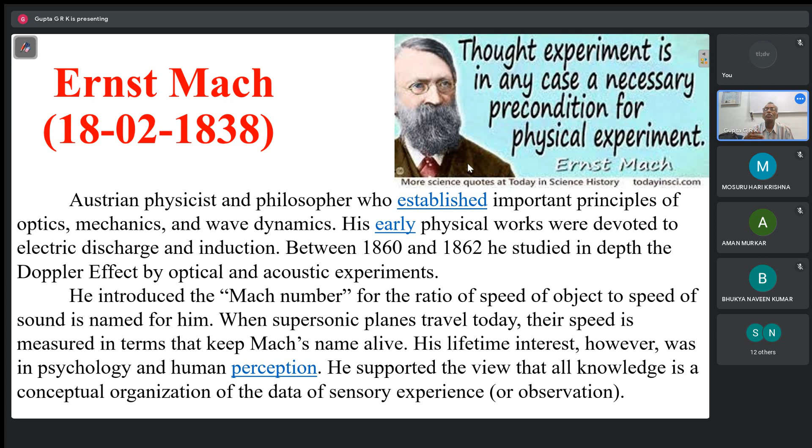So in the vaneless space, what is going to happen? P naught also is constant. And here what we assume is the flow is free vortex, or angular momentum is constant. So R CW is equal to constant. These are the things we assume. Knowing R and CW at impeller exit, I can find out CW at diffuser inlet.

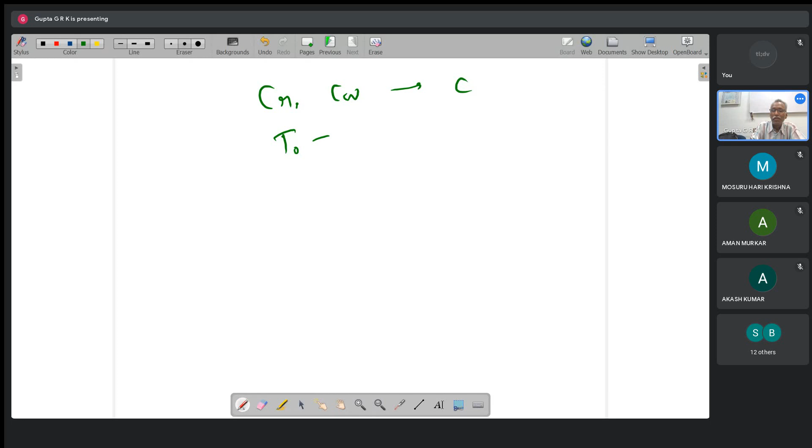So here we have to iterate, assuming CR2. Knowing CR and CW will give you C, and knowing C, I can calculate T. I can calculate P using the isentropic relation, then rho, and then CR. So A is 2 pi r b. In that way, I have to get it and repeat the calculation.

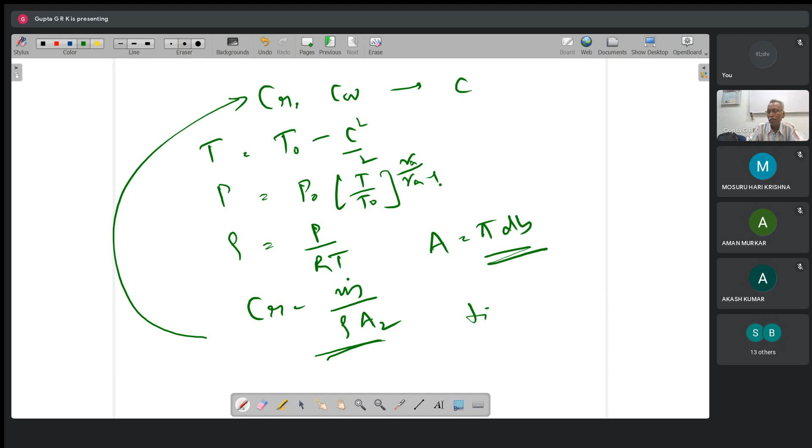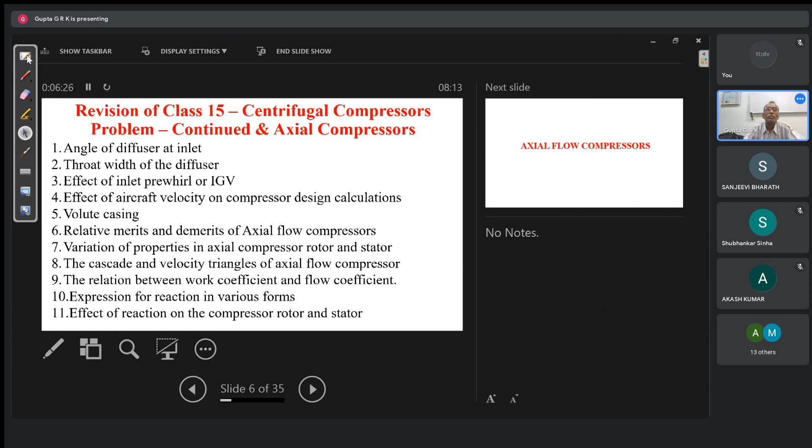Sir, not audible. Sir, your video is lagging. Lagging? Yes, sir. What to do? I cannot do anything. It is coming later. At that arrow mark, you were stuck for 15 seconds, sir. And again we are seeing this window, at the radius of. Okay. No problem, sir, you can continue. If again there is any difficulty, you tell me. We will ask again, sir.

Okay. So repeat a similar calculation at the radius of the diffuser throat. We calculate CW, assume CR, and calculate C, then T, then P, then rho, then again CR, and repeat it. Then calculate alpha equals tan inverse CR by CW. Then the area is taken to be 2 pi r b into sine alpha. This becomes the area, and once you get this area, divide by the number of blades, Z.

This gives me the diffuser throat width, where Z is the number of diffuser vanes. So this is the way we have to do the problem. And then two more points. If there is an IGV, consider pre-whirl.

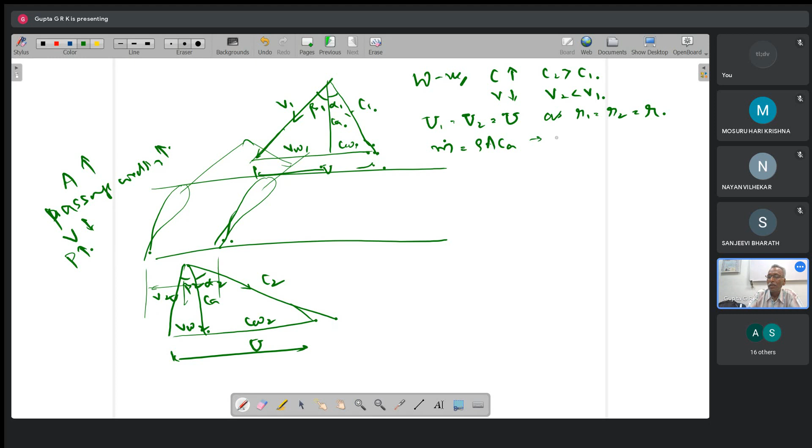And so m dot is equal to rho A CA. And here rho increases and A decreases, because of which CA is constant. So U is constant and CA is constant. That is, the base and altitude of inlet and exit triangles are the same. Okay, so these are the things you have to observe.

And then we have derived various relations like U is equal to CW1 plus VW1 equal to CW2 plus VW2. So from which we get CW2 minus CW1 is equal to VW1 minus VW2. And also this is CA into tan alpha 1 plus tan beta 1 is equal to CA into tan alpha 2 plus tan beta 2. So these are the things we have seen.

Or if I divide this by CA, U by CA; CA by U is the flow coefficient. So I'll get 1 by phi is equal to tan alpha 1 plus tan beta 1 is equal to tan alpha 2 plus tan beta 2. Okay, so this is one relation. And then we have got W is equal to U into CW2 minus CW1 or U into VW1 minus VW2, or this is equal to U CA into tan beta 1 minus tan beta 2. This is the second relation. So I can take this as the first relation.

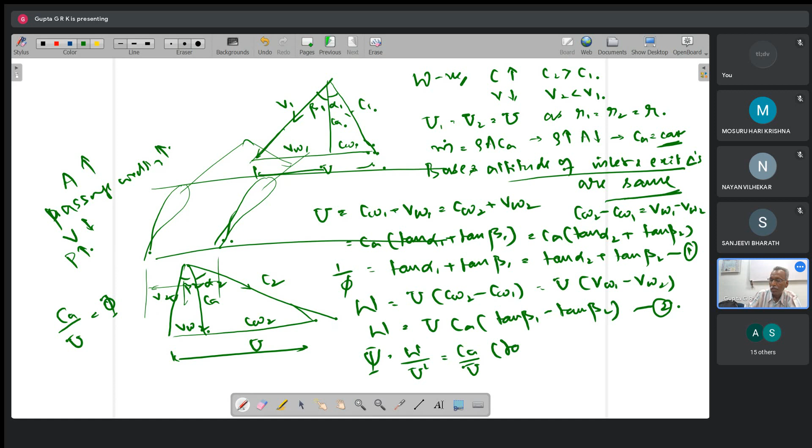And so W by U square, if I divide by U square, psi is equal to phi into tan beta 1 minus tan beta 2. Okay, so this is one relation. And then we have defined what is reaction. And the reaction is delta H rotor by delta H stator plus delta H rotor.

So delta H of stage is equal to delta H naught of stage if C1 equal to C3. That is, if they are repeating stages. Repeating stage means C1 equal to C3 and alpha 1 equal to alpha 3. And delta H naught of stage is equal to W. So R is equal to, for delta H of rotor, H2 minus H1 by W. So H2 minus H1 is V1 square minus V2 square by 2, by W.

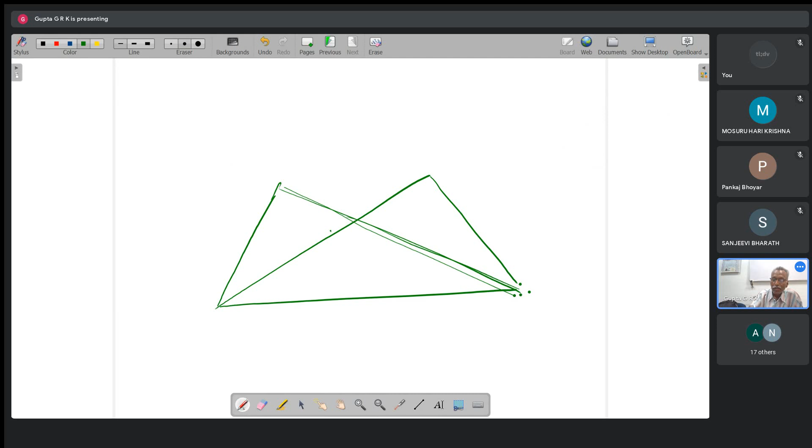So what I do is inlet triangle large V1 small c1 and exit triangle small v2 large c2. Okay, this is v1, this is c1 inlet triangle, and u is same for both. Height is same for both. And for inlet triangle, this is alpha 1, this is beta 1, and this is c2, this is v2, this is alpha 2. Okay, so this is the way I can overlap both the triangles.

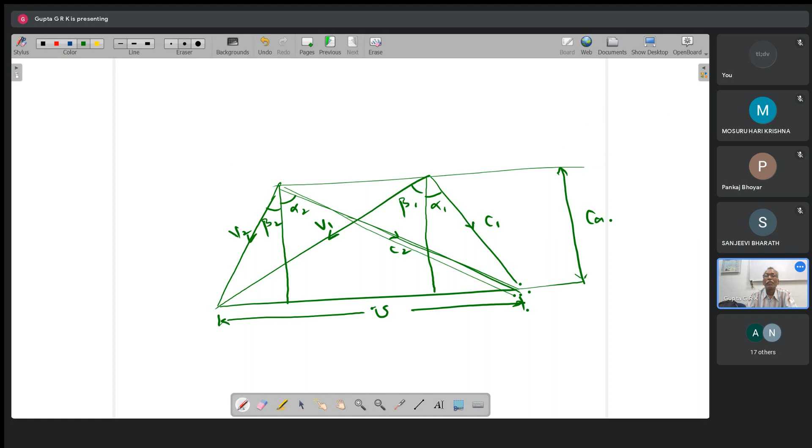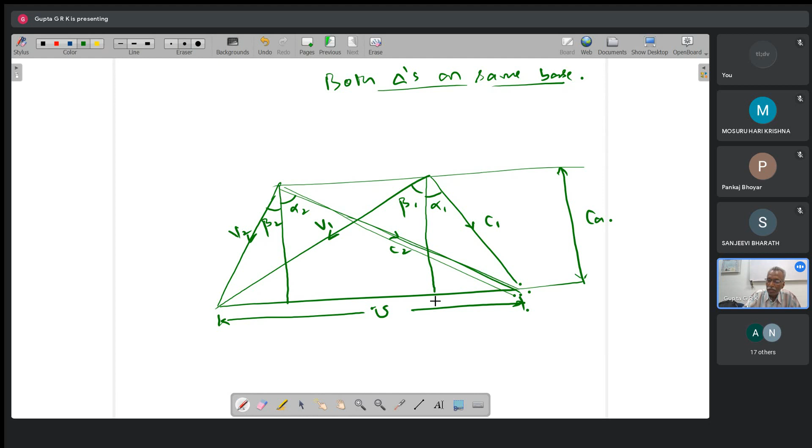Okay, here I will tell you some interesting things, right? Because normally I am interested in non-dimensional things, right? Okay, and here I will put these things also. This is CW1. This is VW1. This is VW2.

And if I make them non-dimensional... Sir, why relative velocity at exit is decreasing compared to inlet? Any reason? That's what I'm telling. This is diffusing passage. Okay, sir. Relative to blade, because the width is increasing, that's what I told. Okay. So rotor, the cascade, if you take, A increases, and because of that relative velocity decreases and pressure increases, density increases, temperature increases. That's what I am telling, right? Yes, sir.

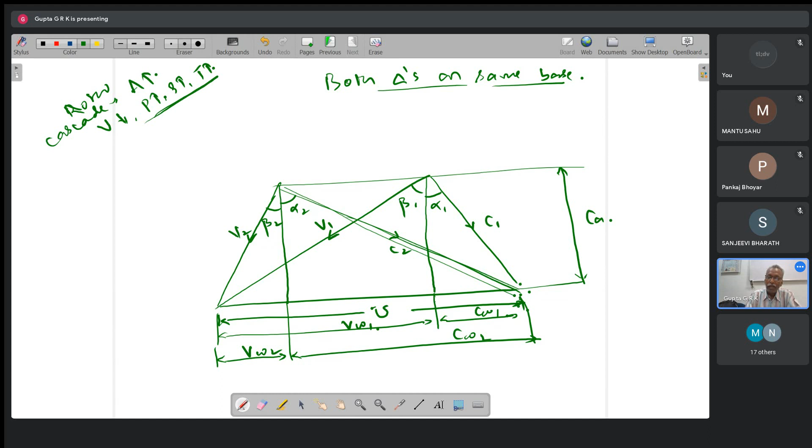Okay. And now I try to make the triangles non-dimensional. Divide all the velocities by u. Okay. So this is CA by u, C1 by u, C2 by u. Like this. So I will get like this. Will the triangles be different?

Angles, will angles change or same? Will it be same? Same, sir. Same, because I'm just scaling them, right? So angles will not change. Angles will be same. Okay. So everything gets zoomed out or zoomed in. Okay. So this is the way we get the triangles.

So what is the base of the triangle? 1, yeah, is equal to unity. And height of the triangles? Phi. Height of the triangles is phi. Very good. So that is flow coefficient.

Okay. Now, if you see here, what is the distance between these two? I can write this as, see, CW2 minus CW1 by U, or VW1 minus VW2 by U, like this. Am I right? Yes, sir.

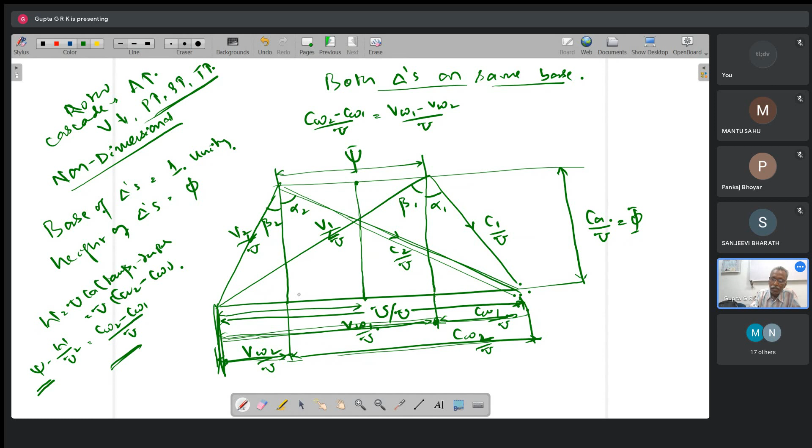And here one more thing I will do. From this point, this is VW1 and this is VW2. So VW1 plus VW2, if I take the center point here and draw, this will be VW1 plus VW2 by U. Okay. And so what is VW1 plus VW2 by 2U? Average of VW1 by U and VW2 by U. If this is VW1, this is VW2, right? So this distance will be equal to VW1 plus VW2 by 2U, which is reaction.

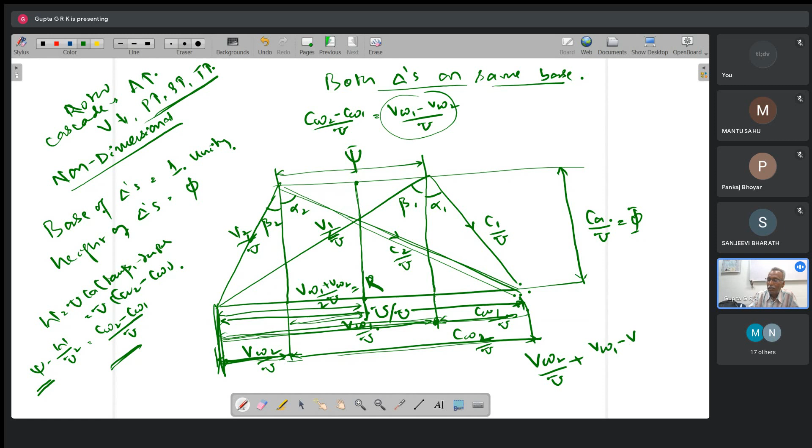Is that clear? If you want it still clearer, this is VW2 by U, and what is this distance? This is half of this, psi by 2, plus VW1 minus VW2 by 2U. So if I take 2U here, what am I going to get? VW1 plus VW2 by 2U. And what is VW1 plus VW2 by 2U? Here we have written that: reaction. So if I take the center point of these two vertices and draw a vertical, the distance from the left corner to this is reaction.

Sir, is this for a reaction of 0.5 only? It need not be 0.5. Sir, for that only VW1 plus VW2 by 2? No, no. That is the general formula for reaction. Let me show you. Phi by 2 into tan beta 1 plus tan beta 2, VW1 plus VW2 by 2U, 1 minus CW1 plus CW2 by 2U. All these are general formulas for reaction. It is not for 50%. If 50%, then this is equal to half, and VW1 plus VW2 will become U, because VW2 is CW1, and CW1 plus VW1 is equal to U. But this is the general formula for all triangles. Am I clear? Yes.

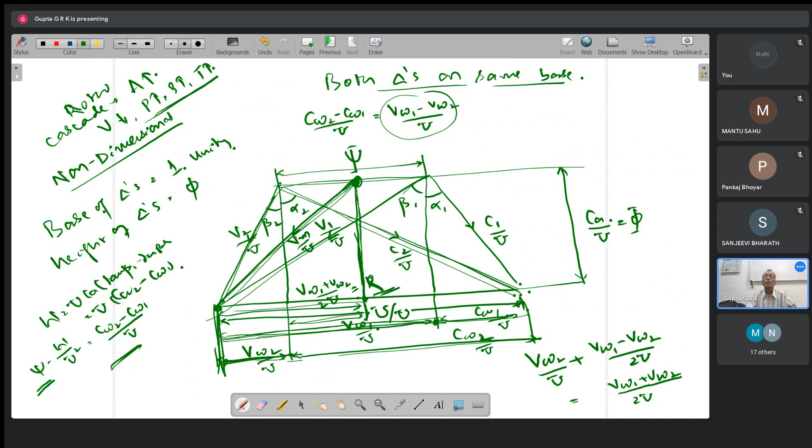Okay, so this is reaction, and to this point, if I draw a line like this, this velocity is called Vm by U. V1 is this, V2 is this. I am taking some point in between, and I call it Vm. It is not exactly mean velocity. Vm is not V1 plus V2 by 2, but VWM, the whirl component of Vm, is equal to VW1 plus VW2 by 2.

And VWM is Ca tan beta m, if this is beta m. This is equal to Ca by 2 into tan beta 1 plus tan beta 2. So this is important: tan beta m is equal to tan beta 1 plus tan beta 2 by 2, or VW1 plus VW2 by 2. So here, reaction is in terms of Ca tan beta m, or Ca by 2 into tan beta 1 plus tan beta 2, or VW1 plus VW2 by 2, like this. This particular relation we use later.

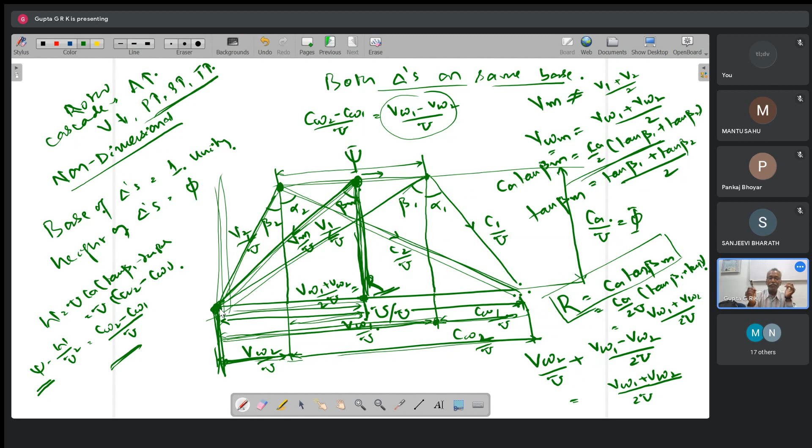Right? And if I move it to the left side in such a way that this particular line comes to this point, then what happens to reaction? Zero. So if I change the position so that this center line goes through this, the reaction is zero. And if I move to the right side so that the center line comes to this point, then what happens to reaction?

One. Okay, so that is the way, if you are asked to draw the velocity triangles for zero reaction, reaction one, and 50% reaction, how they look. If the center line goes through the intersection of these diagonals, this is 50% reaction. Am I clear? Yes. Exactly, both triangles will be the same.

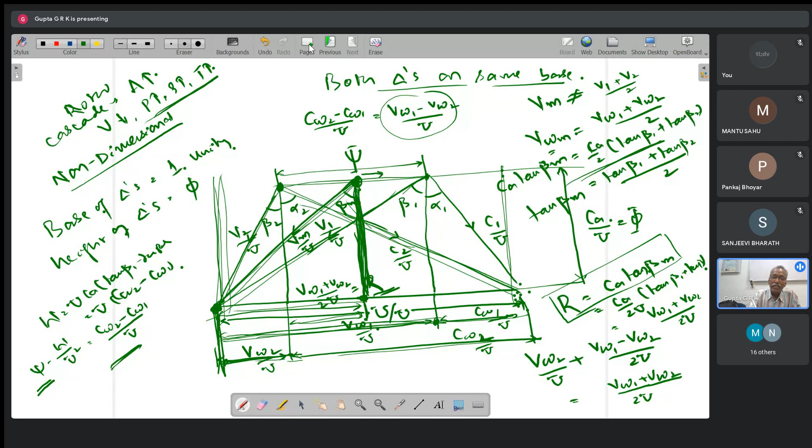I will show you how to draw it. Actually, in an offline class, I would ask you people to draw it. The 0% reaction, 100% reaction and 50% reaction, I normally ask. So suppose I take the velocity triangles, the base I will draw here. If I draw the base here, the center line should go like this. So both vertices will be like this.

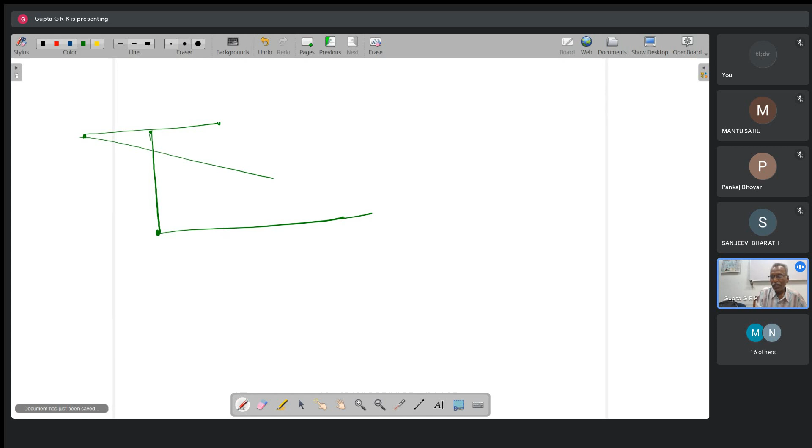So I have brought these two vertices to the left side in such a way that the center line goes through this. Now I draw the inlet triangle. The inlet triangle will be like this, and the exit triangle will be like this. So inlet triangle, exit triangle.

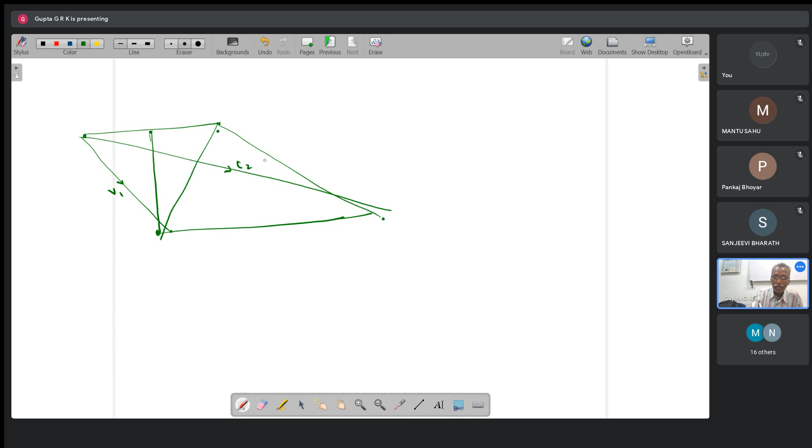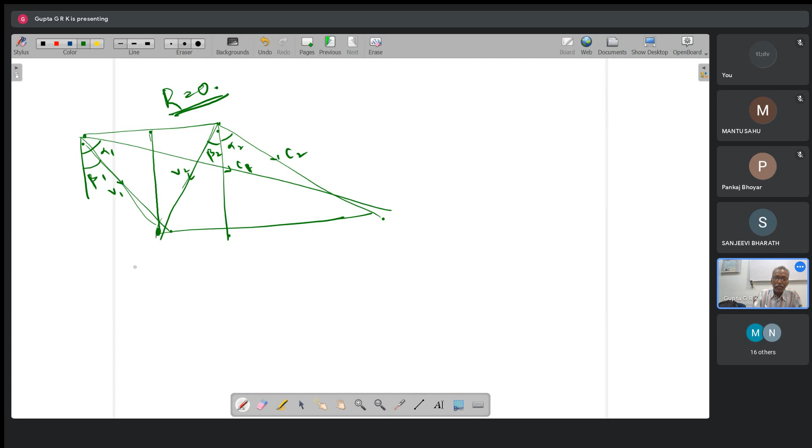It will be like this. Am I clear? And so for the inlet triangle, this is alpha 1, this is beta 1. And for exit triangle, this is alpha 2 and this is beta 2. R equal to 0. Okay, what are the observations we can make here? V1 is equal to V2. Am I clear? And beta 1 equal to beta 2, or minus beta 2, I can say. So this is what we have observed for 0% reaction. So because V1 equal to V2, symmetric rotor blades, or bucket type.

If I draw R equal to 1, again draw the base, and the center line should go through this other extreme. And again, if I draw the two vertices of the triangles, this will become the inlet triangle. So this is V1, this is C1, and this is alpha 1, and this is beta 1. And for the exit triangle, it comes like this. This is V2, and this is C2. And so this is alpha 2, and this is beta 2, like this.

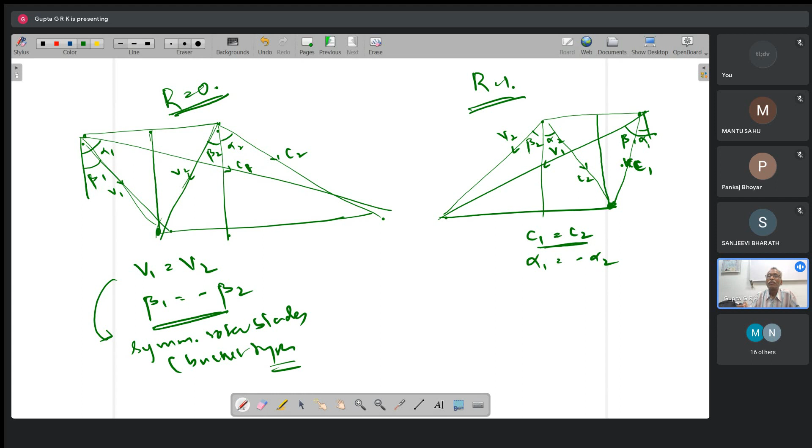So for 100% reaction, what is that we observe? C1 equal to C2 and alpha 1 equal to minus alpha 2. So because C1 equal to C2, the entry velocity and exit velocity for stator is same. So stator blades, alpha 1 and alpha 2 are angles of stator, are symmetric, or bucket type. Is this clear? So this is the way I can draw. It is just for drawing how the velocity triangles will be.

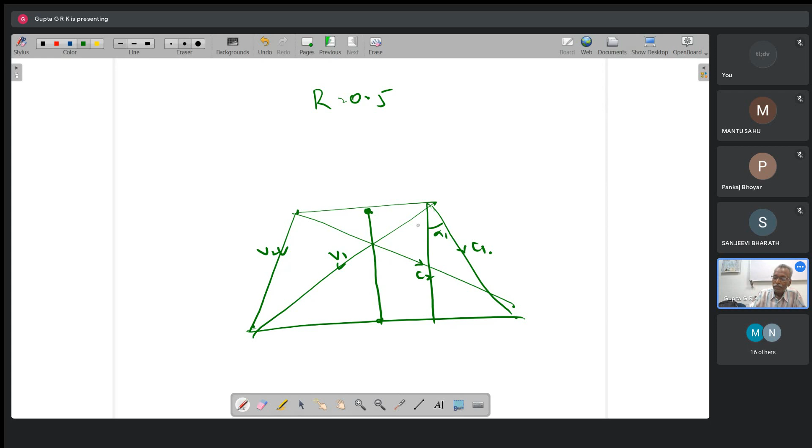But normally for axial compressors, we never use either complete impulse type or completely reaction type. The reaction varies around 0.5. So if R is equal to 0.5, then what will happen? Through the center point, this center point will come and the vertices will be exactly on these two sides. So this will be the exit triangle, and this will be the inlet triangle. So this is V1, this is C1, this is V2, this is C2, this is alpha 1, this is beta 1, and this is beta 2, and this is alpha 2.

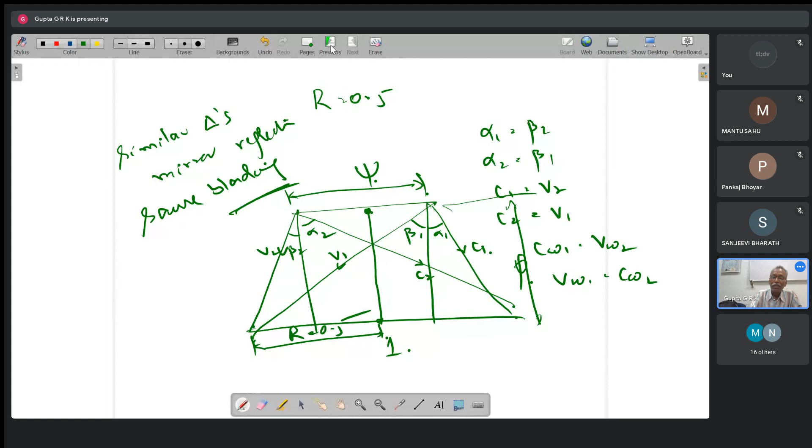So alpha 1 equal to beta 2, alpha 2 equal to beta 1, C1 equal to V2, C2 equal to V1, CW1 equal to VW2, VW1 is equal to CW2. So like this, similar triangles, mirror reflections, so same blading. So all these things will come for the 50% reaction. So base is unity, and this is phi, and this is psi, and R equal to 0.5 here. In the previous one, R equal to 0 here. This is U, and also R is equal to 1. This is phi, this is psi, this is phi.

So what I want to say is, if you want to purchase some blower or a compressor, you see the velocity triangles. Velocity triangles may look different. You don't know how to compare. Then just non-dimensionalize them. Once you non-dimensionalize, you understand these are the velocity triangles for one compressor and these are for another compressor. So by seeing the heights, you can see which gives me large flow. By seeing the distance between the two vertices, you can see which gives me high pressure ratio.

And by seeing the distance between the left extreme of the triangle and the center point of the two vertices, the distance gives you reaction. So what is the reaction also you can understand by seeing the velocity triangles, and you can compare two velocity triangles. Am I clear about this? Yes, sir. Right, this is very, very important. It gives you a complete concept of it. Usually you will not get this in any book. This is from my sir, and I am telling to you. So any questions till now?

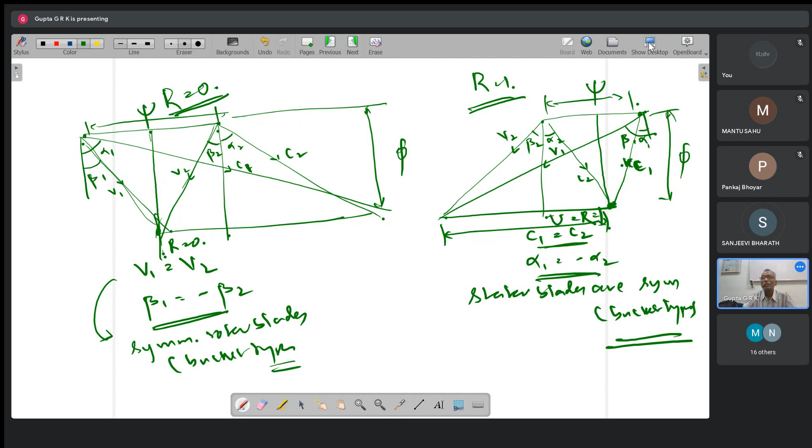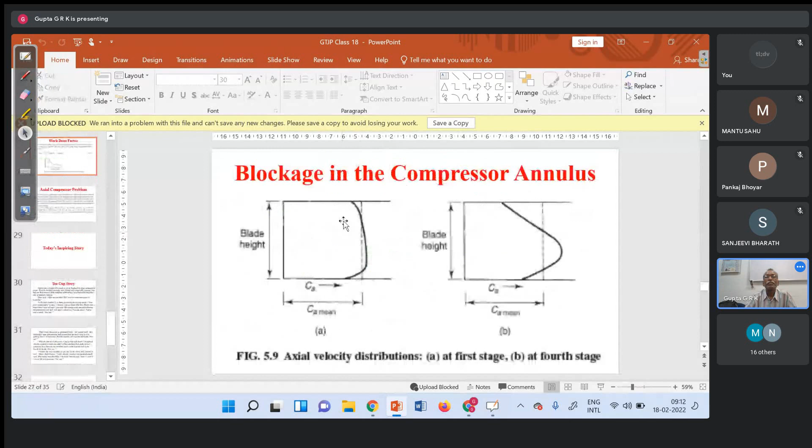Okay. So it's a nice story. It's a teacup story. There was a couple who used to go to England to shop in beautiful stores. They both liked antiques and pottery and especially teacups. So they collect teacups, right? Different shapes, different sizes, different designs, and all. They collect teacups. So they have gone in an antique shop.

And one day, on their 25th wedding anniversary, in a beautiful shop, they saw a beautiful teacup. And they said, "May we see that? We have never seen one quite so beautiful." So, as the lady handed it to them, suddenly the teacup started speaking. "You don't understand," it said. "I haven't always been like this. There was a time when I was red and I was clay.

My master took me and rolled me and patted me over and over, and I yelled out, 'Let me alone!' But he only smiled, 'Not yet.' Then I was placed on a spinning wheel," the teacup said, "and suddenly I was spun around and around and around. 'Stop it, I am getting dizzy,' I screamed. But the master only nodded and said, 'Not yet.'

Then he put me in the oven. I never felt such heat. I wondered why he wanted to burn me, and I yelled and knocked at the door. I could see him through the opening, and I could read his lips as he shook his head, 'Not yet.' And finally the door opened. He put me on the shelf, and I began to cool. 'There, that's better,' I said.